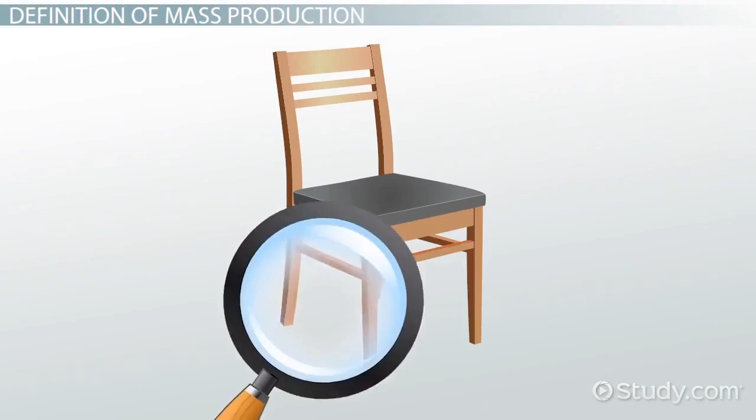In the present day, if I wanted to buy a new set of dining room chairs, I could simply go out to a furniture store and buy them. I probably wouldn't have to spend too much time inspecting each chair before I bought them, because I can assume that they're made on an assembly line. Therefore, they're probably all going to be more or less identical. This type of manufacturing is what's known as mass production.

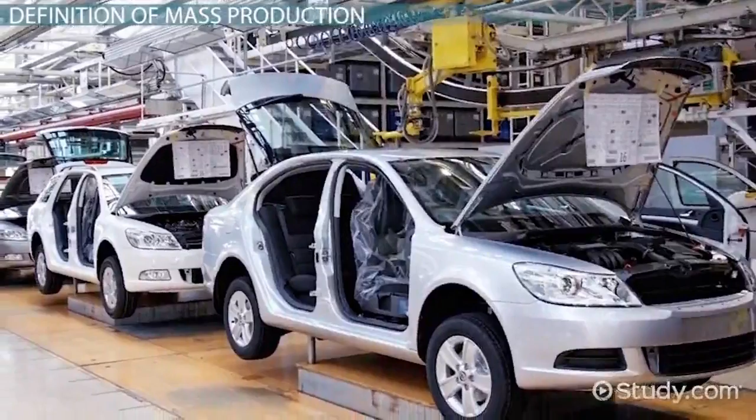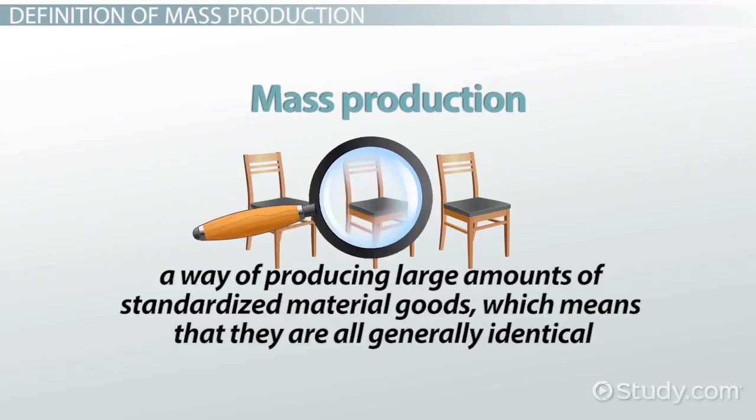And when it was first introduced over 100 years ago, it dramatically changed millions of lives. Mass production is a way of producing large amounts of standardized material goods, which means that they are all generally identical. In most cases, mass production involves the use of an assembly line, which involves a product being moved down a line as the individual parts are added until it reaches the end of the line as a finished product.

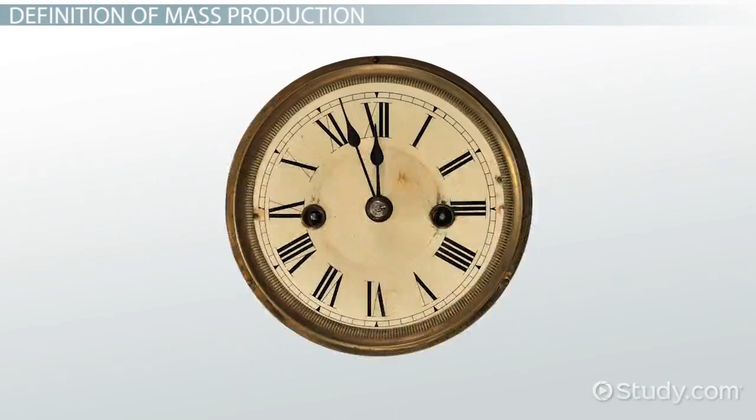Prior to the 19th century, most objects and products were produced by hand, either by a single person or a group of people working together. This process was slow and often produced small batches of items that had no standard shape or size.

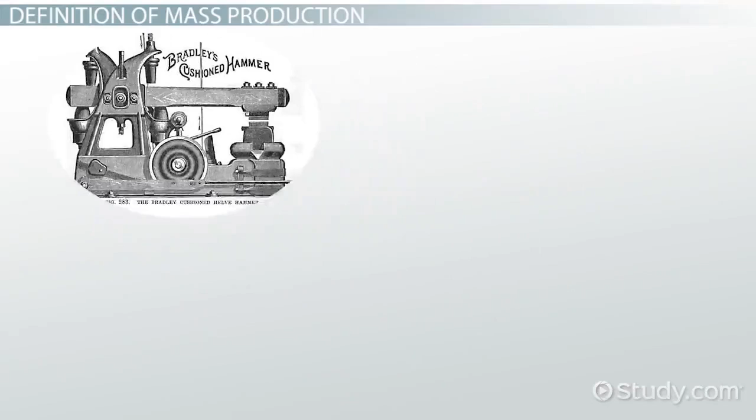Throughout the 19th century, however, new tools and technologies allowed for labor to become mechanized, which increased the speed of production and the output of material goods. Eventually, this type of mechanization developed into the type of manufacturing we are familiar with today.

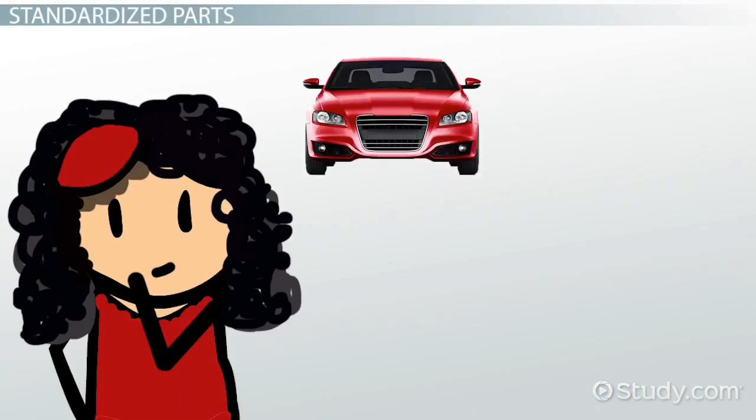As you can probably imagine, things like cars, airplanes, and other machines require many small parts and chemicals in order to be functional. Because the larger machines are designed on an assembly line and are intended to be nearly identical, these parts and chemicals also have to be standardized in order to ensure they work properly.

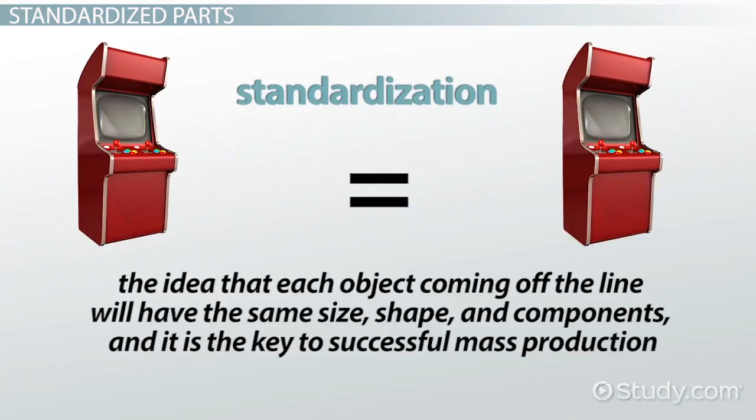As noted above, standardization is the idea that each object coming off the line will have the same size, shape, and components, and it is the key to successful mass production.

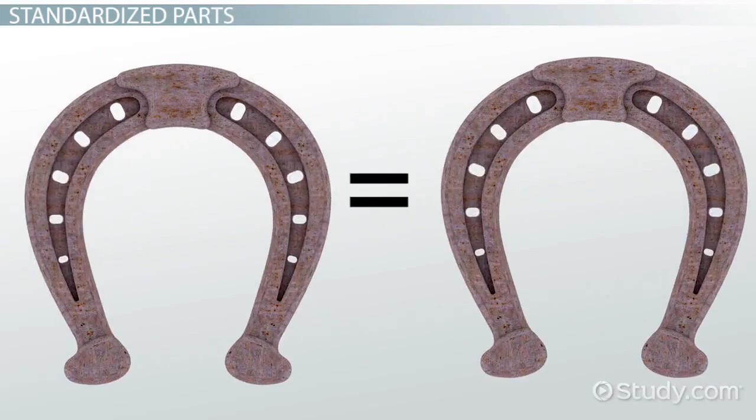Prior to mass production and the industrialization of labor, it was nearly impossible to create a large quantity of something and have each individual piece be identical. Imagine if you were working in an auto plant and had to create each ignition switch by hand. What do you think the odds are that they would all be compatible with the cars coming off the line?

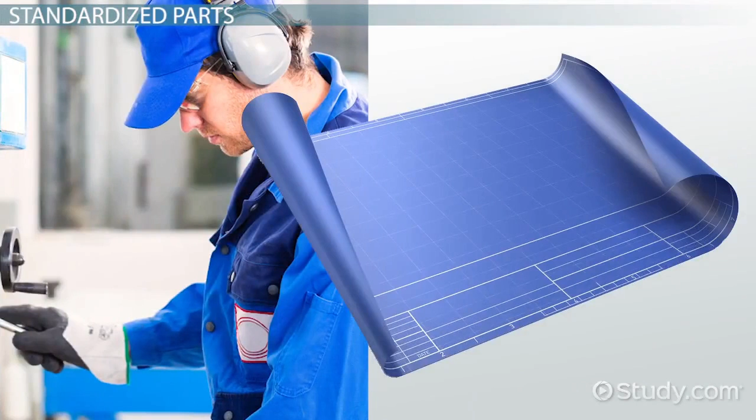In mass production, the standardization of processes and technical specifications allowed for these individual pieces to be identical, which in turn allowed for more complex objects like cars to be produced quickly and affordably.

If you were to ask a group of people what they thought was the most significant invention of the 20th century, it's likely that one of the most popular answers would be the automobile. But as much as the automobile changed the way people lived and traveled, it also dramatically altered the way in which products were manufactured.

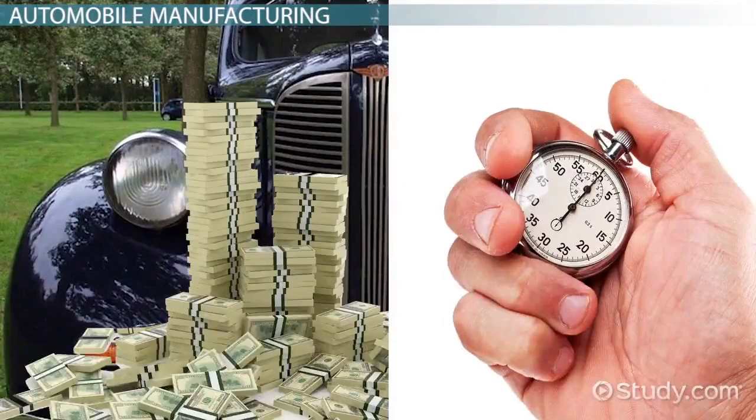Although cars were being produced throughout the first decade of the 20th century, their production was often slow and costly, which made them expensive and out of reach for most individuals. In 1913, however, Henry Ford, owner of the Ford Motor Company...

Henry Ford changed the American way of life. Ford's designs changed how we get around, from horse-drawn carriages to automobiles.

Henry Ford was an engineer and a businessman. He spent his early career working on steam engines. In 1896, Ford built his first car, the quadricycle, and never looked back. He spent the rest of his career making cars.

The Model T became the most famous, a car that changed history. Before it were cars that only the very rich could afford. The first Model T was built in 1908, and with a top speed of 45 miles per hour was a much faster way to travel.

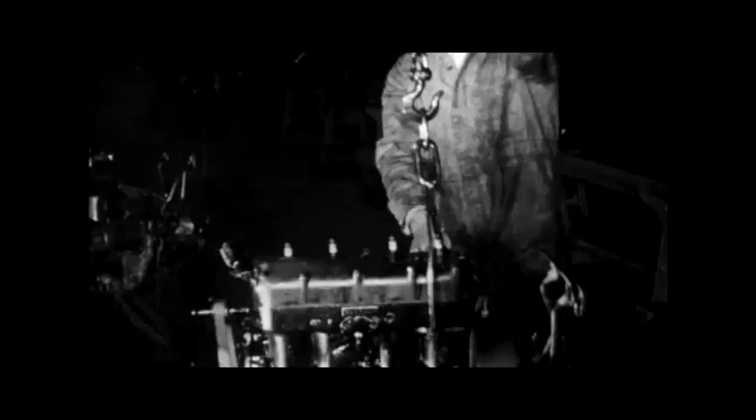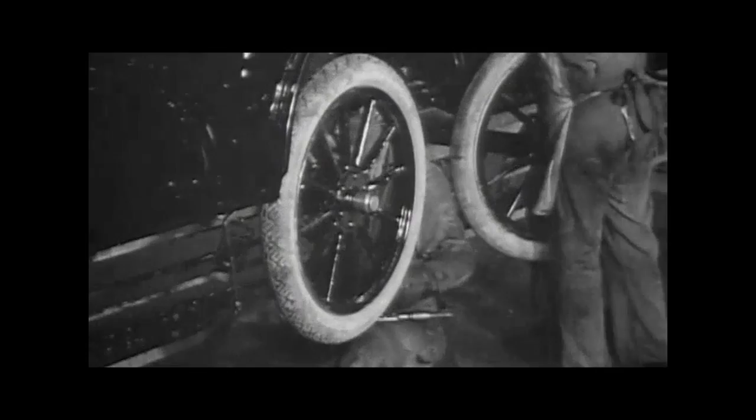So the Model T cost less and took less time to assemble, making it a car that many working Americans could afford. By 1927, the Ford Motor Company had made a total of 15 million Model Ts.